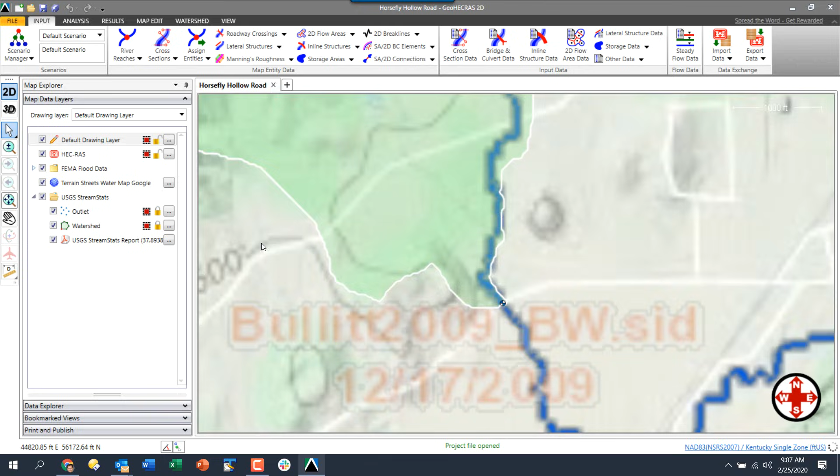You guys all did that bridge project yesterday. So let me go see if I can find that one. So let me go in my folder, under training examples, bridge project. Let me see if I open this guy up. Oops, wrong file. So let me grab the other one. Go open that one up. There we go. That's a bridge we had yesterday, right? And someone was complaining about not following the contours.

The problem with it is it's following the grid, and what's happening is it's smoothing those contours out. This grid resolution is 8 feet by 11 feet. So that's part of the problem, it's not following those contours because it smoothed those contours, and in reality it's trying to follow that grid. And then it smooths that edge of that line, so it gets a little different.

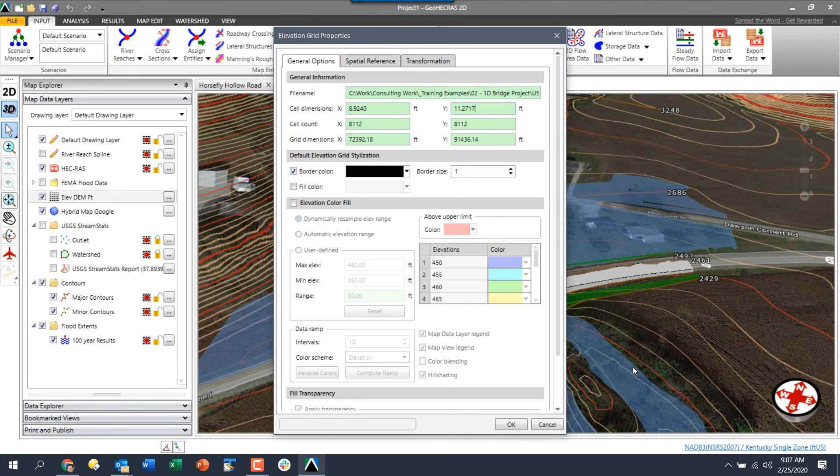The other thing is, someone reported that it filled in this area here. And what caused that, if I go over to my results, go to flood map, in here's an option for filling that area. I'm trying to remember where it is. I think it's right here. So remove ponded areas and holes less than or equal to 10,000 square feet.

So if you change that value down lower, this hole over here that you see in my original model, in my training course, that hole will show up again. So you can change that option. Either turn it off or lower that value.

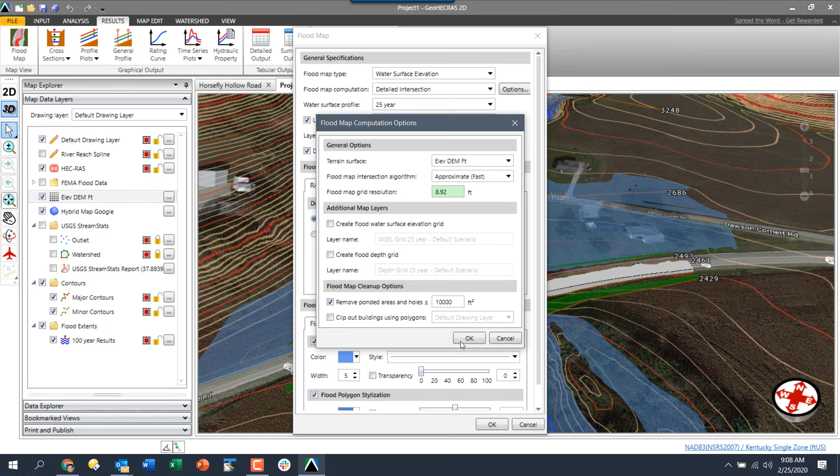And then someone asked yesterday, they wanted to go and clip out some buildings. So if you create a polygon layer in GIS and use that, you can clip out those buildings using this option there. And I could demonstrate that real quick. We'll go back over to the first project I did yesterday. So let me go find that. It was for the city of Akron.

And let me just see if I have that model here. There it is, flood analysis. Hopefully it has all my data in it. I don't remember if I saved it, so we'll see.

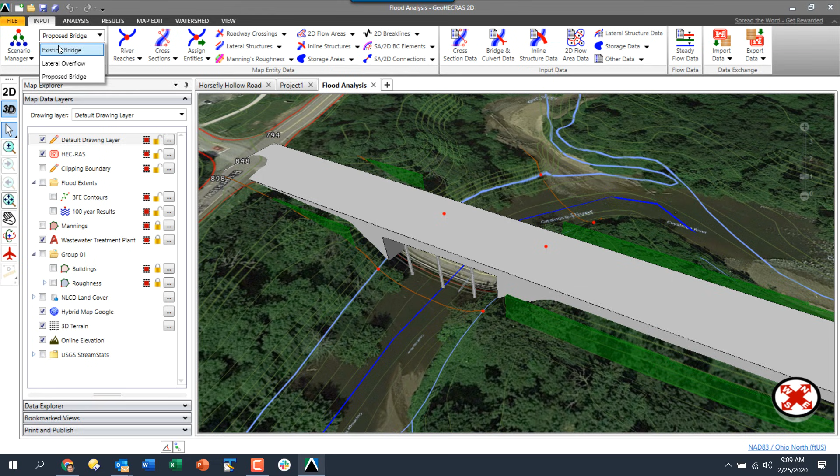Sure enough, so there's my model from yesterday. Remember that? In fact, that'd probably be a good one to do scour analysis on, right? So we can go look at our existing bridge, that one. But we did have some structures here, right? We had some buildings. I'll turn the buildings back on so we can see them. You see all those structures there? And when we generated our flood map, of course, it covered up those buildings.

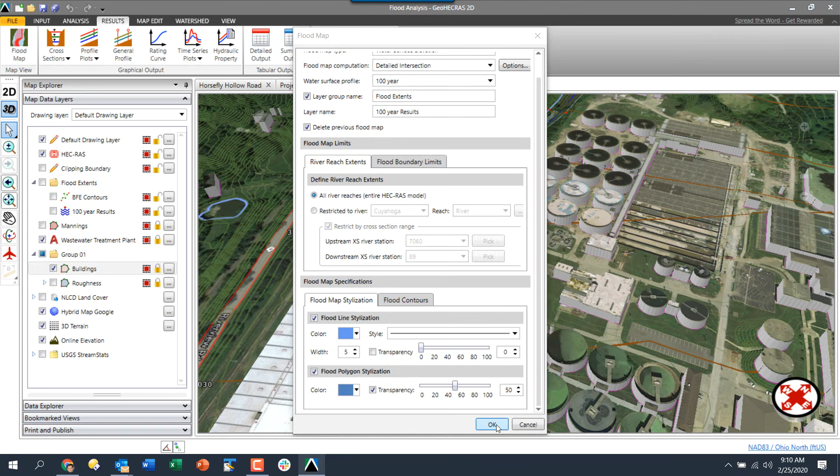So if we go generate that flood map again, if we go to results, go to flood map, and I want to look at my 100-year storm, and I think everything should be good. I'm not going to turn on the buildings yet, so we'll leave that off. And just hit OK. It's going to recalculate our flood map. And we can see our flood map in there, but if I unclip the buildings here, you can see it's covering up where the buildings are.

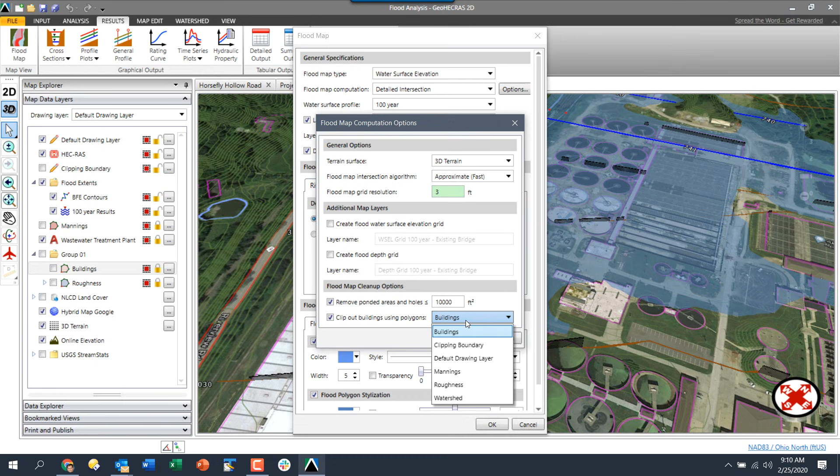So I might want to crop where the buildings are. So what we'll do is we'll go ahead and leave the buildings turned off. I could turn them on again, but we're going to go over to our flood map computation options. We'll go ahead and clip out any buildings, and notice it looks through the list of layers looking for a word like building or structure or whatever, and it tries to guess at what name that is.

And then I'm going to turn this option off, otherwise it's going to fill up all these holes here. Hit OK. Hit OK again. It's going to recalculate that for us and should clip that for us. See, so now you can see these holes are put in your model. So there's some additional options there.

If there's things that we're not doing though, let us know, because someone had mentioned something yesterday to improve the program, and that's something that I had never thought of, a kind of unique idea. So as you're working with the software, just use this as a sounding board. Most of the stuff you see in the software actually came from users like yourself saying, this product's pretty good, but you could improve it some. And so we definitely appreciate that.

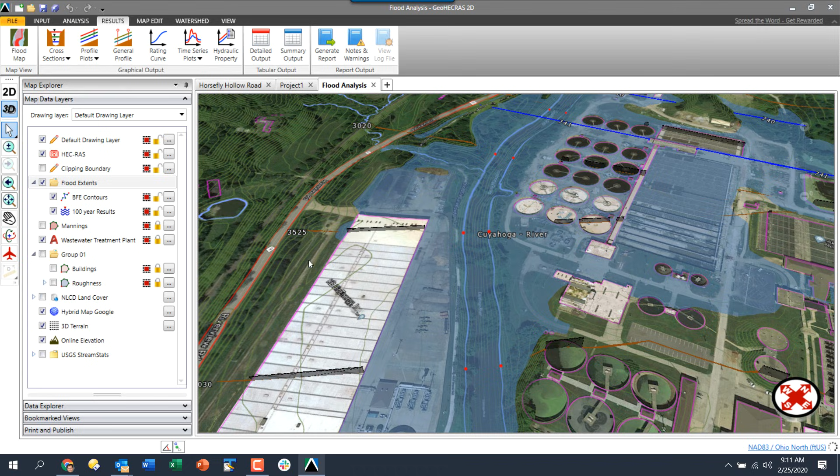Well, let's go and do a scour analysis on this, right? We have this bridge down here, and you can then try it on your bridge. So we're going to go and look at that for the 100-year storm, see what happens for that bridge structure. So to actually calculate scour, I have to have a velocity distribution through the bridge opening, or I can't tell exactly what the velocities are around those bridge piers and the abutments.

So if I go and look at that structure in our cross-section plot, right now you see it's a solid color. If I go to options and I turn on velocity distribution, it's just colored as one color. That tells me I haven't computed the velocity distribution. So there's specific instructions we have to give HEC-RAS to calculate that. So there's different types of scour. There's abutment scour, that's around the abutment. There's pier scour, and then there's contraction scour.

In fact, I have a PowerPoint that demonstrates that. Let me see if I can find that quick. So we'll go over into my courses here. Let me see if I can find where that one is. Trying to remember which one. I think it's advanced bridge modeling. Let me take a look at this. All right, so there we go. So let's go over this. All right, so we'll look at bridge scour.

So scour is probably the main cause of bridge failures. From analysis here, it says 60% of bridge failures are from scour. So what's happening is usually the foundations or the piles for the piers are eroding away, and the pier becomes unstable, like you see here, and the bridge fails because of that. So as the water contracts through that opening, it speeds up.

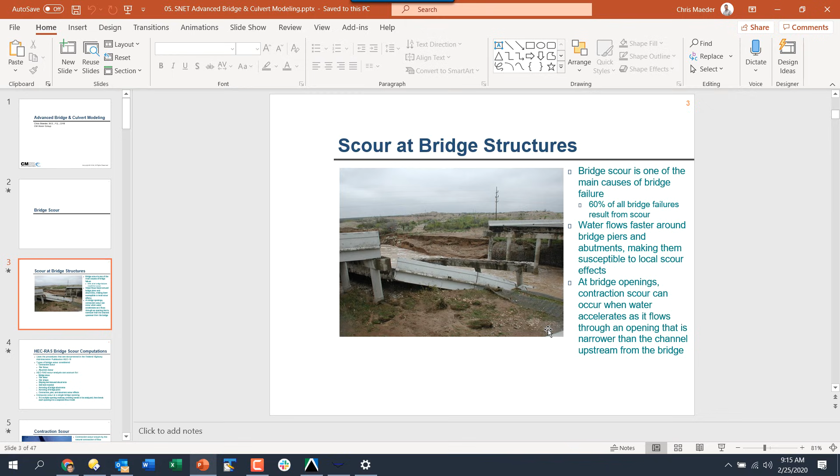So there's a document called HEC-18. It's published by the Federal Highways. It has no relationship with the Army Corps HEC Center. This stands for Hydraulic Engineering Circular 18. And they talk about the different types of scour. There's contraction scour, pier scour, and abutment scour. We'll go over that in this presentation.

So based on the bridge skew, the pier shape, and the abutments, that can change the amount of scour that occurs at a structure. And HEC-RAS only computes the scour at one bridge opening. So if you have a multiple bridge opening, you actually have to break the model up, so you have to analyze each bridge separately.

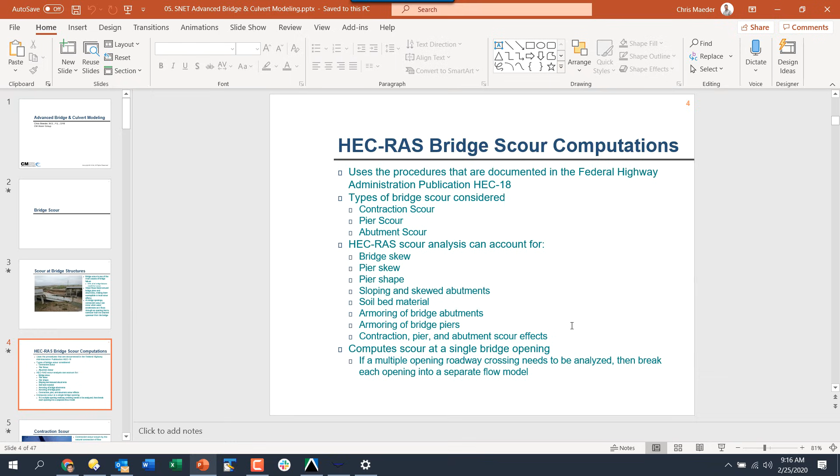And the way you do that is you have to close one off, model that, and reduce the amount of flow so it's going through the one bridge as you compute it through your multiple bridge opening, and then analyze the other one the same way.

So first thing we're looking at is contraction scour. So as the flow contracts through that opening, it's going to speed up. And so there's two types of scour that occur. And again, the mechanics of that scour is pretty sophisticated, so they develop empirical equations to kind of predict that.

And based on, you either have sandy soil or you have clay soils, and that can have a different effect in there. Usually clay soils just take longer, and usually the same amount of scour occurs over a long period of time. But anyways, there's something called clear water scour. It's basically assuming that the water upstream of it has got no sediment in it. There's no suspended sediment. And then there's live bed scour, which actually has sediment in that.

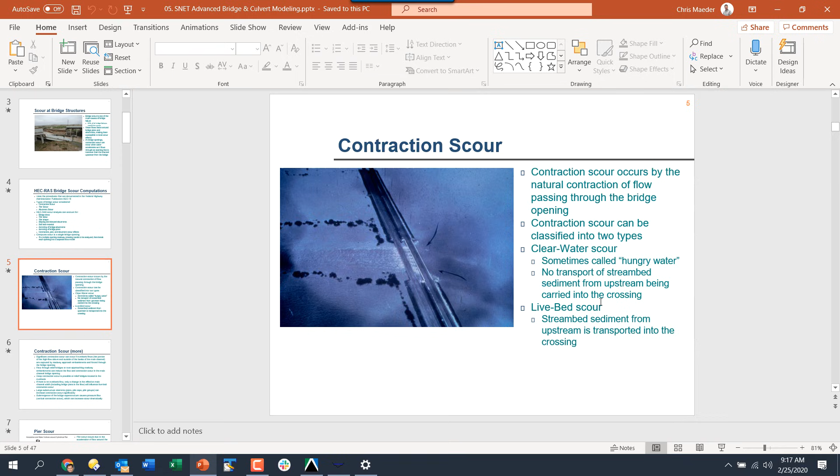So there's two equations that are used for predicting that. And you got to be careful of these equations. They give you kind of an estimate, but sometimes they can get unrealistic. So I have this description here. I'm going to just read it because there's too much text to kind of summarize it.

So significant contraction scour can occur if the overbank flows, the portion of the high flow above and outside the banks of the main channel, are captured by the roadway approach embankments and forced through the bridge opening. So that makes a lot of sense, right? So if we got a lot of flow on the overbanks, as the flow contracts through that bridge opening, it's going to speed up quite significantly, and that will cause quite a bit of scour.

Flow through relief bridges or over approaching roadway embankments can reduce that flow and the contraction scour. So if we have a place where water can divert itself, obviously it reduces the amount of water that's flowing through the main bridge opening. Deep contraction scour can occur also in the relief bridges located in the overbanks. Again, you can't analyze that directly with HEC-RAS. You'd have to break that model up into pieces and analyze each one separately.

If there's no overbank flow, only a change in the effective main channel width, including the bridge piers in the flow, that will influence the live bed contraction scour. Large substructure elements like piers, pile caps, pile groups can increase contraction scour significantly. Basically, it creates a pressure flow underneath there and speeds up that flow again, kind of like flowing through an orifice. You would think of it like if you punched a hole in a milk jug. You're going to have a lot of velocity on that.

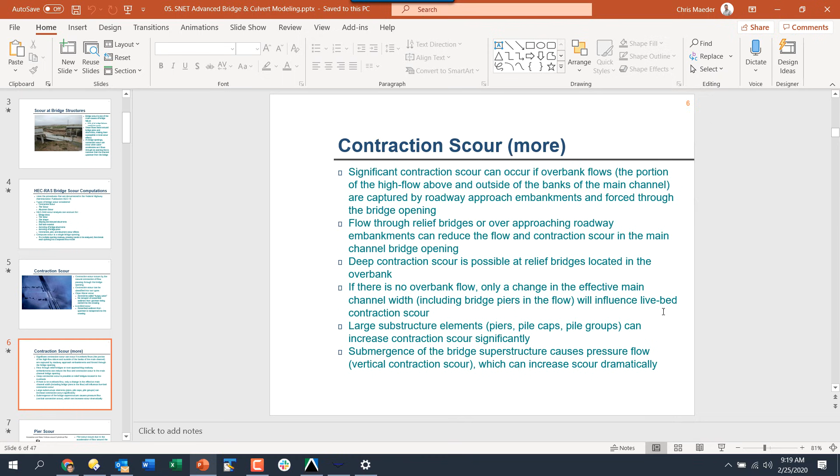Okay, next thing we're looking at is pier scour. So there's two types of scour that can occur. There's a wake vortex and a horseshoe vortex that occurs. So pier scour occurs due to the acceleration of flow around the pier and the formation of these flow vortices, known as a horseshoe vortex. So the water kind of tumbles on itself as it goes through there and digs up behind that, along the edge of it. Then the horseshoe vortex removes the material from the base of the pier, creating a scour hole.

As the depth of that scour increases, the magnitude of the horseshoe vortex decreases. So it kind of gets reduced by that, thereby reducing the rate that material gets removed from that scour hole. Eventually you get to a point of equilibrium between the bed material being withdrawn and deposited, and basically the scour hole stops growing.

So if we look at that in more detail, the width of the pier has a direct effect on the depth of scour. That would be kind of obvious, right? Wider piers produce deeper scour than narrow piers under the same conditions. The maximum expected pier scour depth ranges between 2.4 and 3 times the pier width for circular or round nose piers aligned with the flow. Now, circular piers are almost always aligned, right? I don't know how you would have it not aligned.

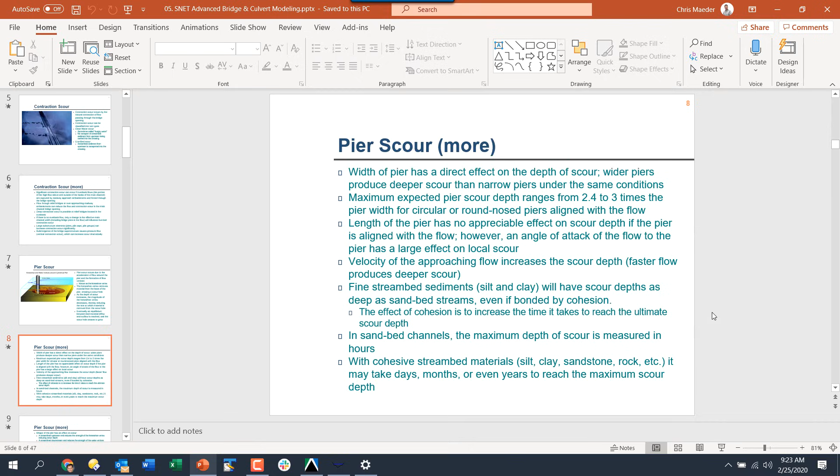All right. In sandbed channels, the maximum depth of scour is reached in hours. So the first time through it, it's going to erode quite quickly. Whereas cohesive stream beds, you talk about clays, silt, sandstone, even rock, it can take days, months, or even years to reach that maximum scour depth.

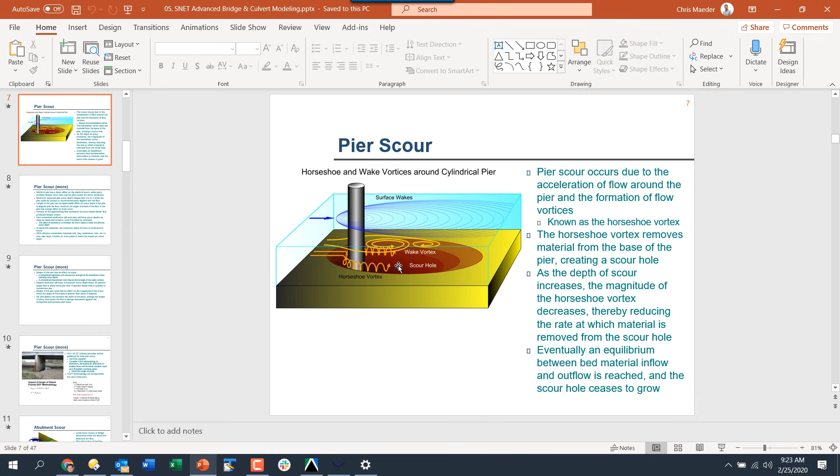So the shape of the pier has an effect on that scour. A streamlined upstream end reduces the strength of the horseshoe vortex, reducing the scour depth. A streamlined downstream end reduces the strength of the wake vortices. So if you remember, if we go back to that picture, we have two types of scour here. We've got our horseshoe vortex occurring here, and we've got our wake vortex that's occurring there. So it's two effects that we're trying to simulate.

A square nose pier will have the maximum scour depth, about 20% larger than a sharp nose pier and 10% larger than a cylinder or round nose pier. The shape of the pier nose has no effect on the magnitude of the scour when the angle of attack is greater than 5 degrees. So if we have a skewed bridge pier, it doesn't matter what the shape is. It'll be the same amount of scour. Now, like I said, if you have a round pier, there's no skew angle associated with that unless you have some sort of diaphragm between the two piers.

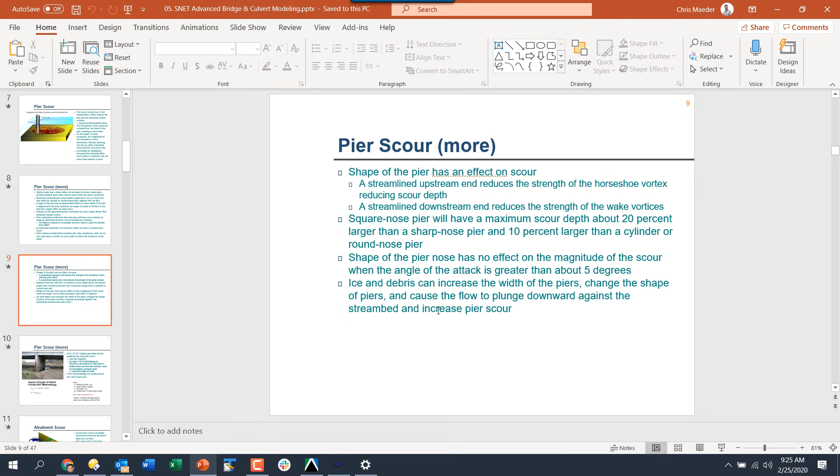Ice and debris can increase the width of piers, changing the shape of the piers and cause the flow to plunge downward against the stream bed and increase the pier scour. So that's something you have to analyze when you're doing bridge modeling. Up in Canada, I do projects up there occasionally. They have to worry about debris a lot because they'll get a storm and logs and other stuff will be floating down. It'll get hung up underneath the structure, decrease the bridge opening and increase the velocity of flow going through the bridge opening, creating more scour. So that's a real problem for them up there. And I would assume you probably have similar instances around here.

So HEC-18 provides further guidance on local pier scour. They say use the Colorado State University equation, but there's a new equation that was developed by Florida DOT as an alternative for wide piers, where you have very shallow flows with fine bed material. That is not yet incorporated into HEC-RAS. So if you want to analyze that, you have to download that document, HEC-18 fifth edition, and do it with a spreadsheet. And you can do it quite easily. The equations are set up. In fact, you could probably search for a spreadsheet for that equation and pull it up.

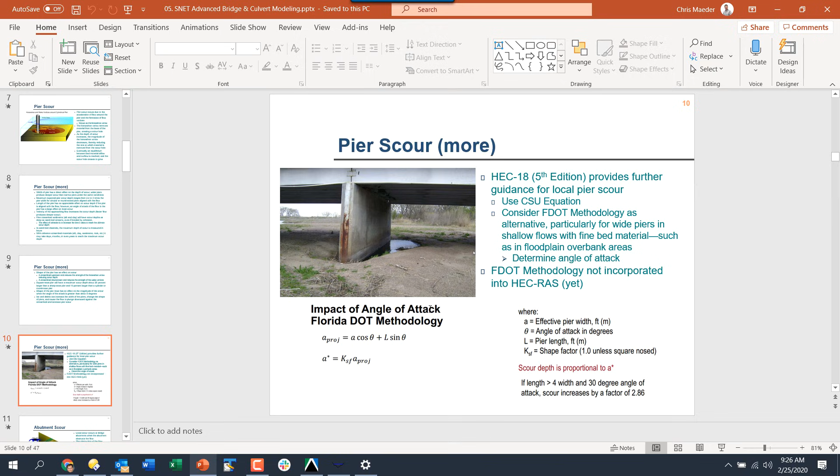So local scour occurs at the bridge abutments when the abutment obstructs the flow. It's pretty obvious, right? The obstruction of the flow forms a horizontal vortex starting at the upstream end of the abutment, running along the toe of the abutment, and forms a vertical wake vortex in the downstream end.

There's one by Richardson called the HIRE equation, and then there's one by Dave Froehlich. I went to school with Dave, so that equation was developed when he was at the USGS.

So abutment scour, there's potential for lateral channel migration. So basically it can move sideways, right? So you can scour out your abutment and your bridge can move. So there you want to look at armoring. You want to go and armor that abutment so you don't have that issue. Long-term degradation and contraction scour should be considered when monitoring the abutment scour.

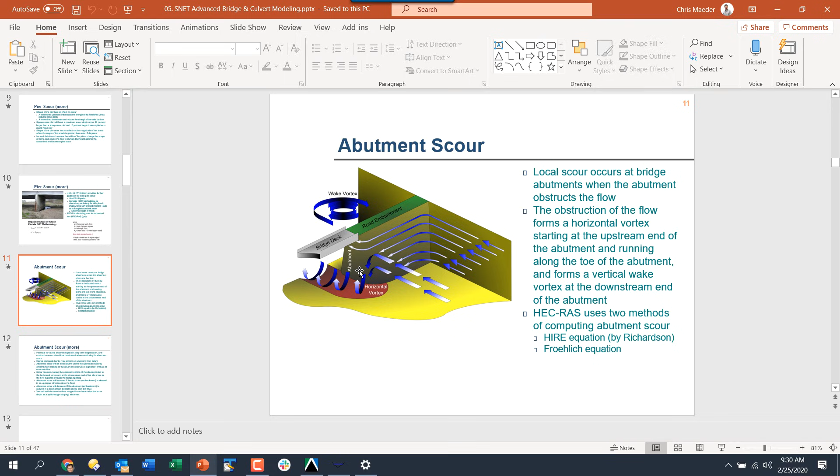Okay? Because if we look at this picture again, if I have a vertical abutment here, that wake vortex can drill right down. If it's sloping, that wake vortex has a difficult time doing that because it's fighting the slope of that abutment and can't grab hold. So vertical abutments have quite a bit more scour. I think I may have given you a number.

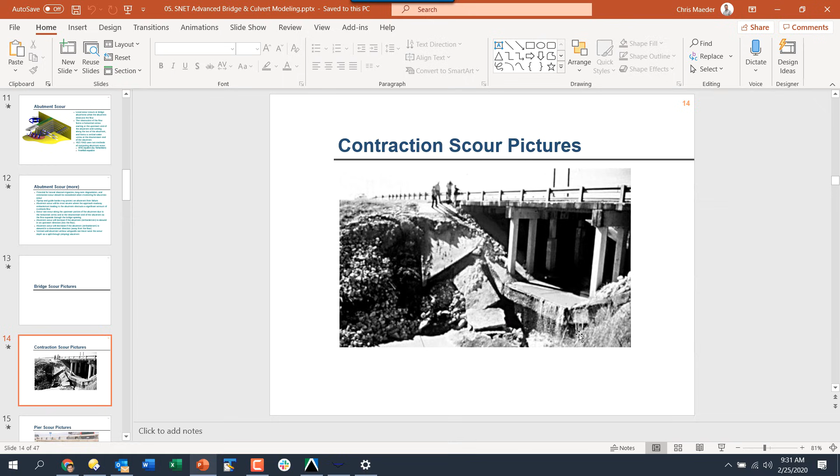So we'll get some pictures here. So this one is in California. It's a while back. They basically lined the bed with concrete, which worked fine, but the problem is that it eroded downstream of that bed, and the concrete fell away. So the bridge piers are still there, but you can see it's starting to erode downstream of that. And this bridge was actually still open, and cars were driving through it.

So in this case, the bridge piers failed just because the amount of sediment coming through there broke them off. So that's quite a bit of load that's coming through there. If you go out and stand in a flood, and if the water is flowing at 6 feet per second, which is pretty fast, and it's up to your kneecap, you cannot stand in it. It'll knock you over. That's how fast just plain water will be causing that.

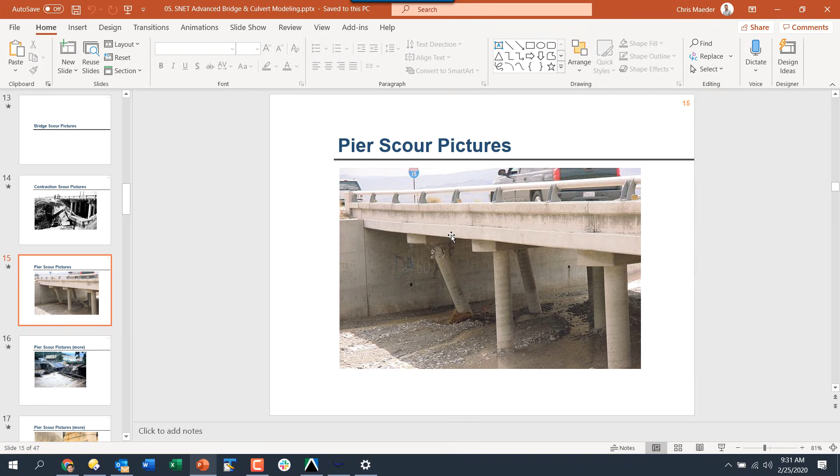Of course, you could go to the beach. I don't know if you have an ocean here, but if you go into the ocean, you try to stand up, and the waves will knock you right over. So if you have a sediment load in there, that's basically mud flow, that'll knock those bridge piers right off. So in this case, it just tore them off, and you can see the actual bridge is kind of bending down in there. Which state is that?

California. So this is up in Canada, and here's a case where they had a spring thaw, and a lot of debris came down, and just because of the debris that got plugged up inside that bridge opening, it took out that deck. And you can see they put in piers to try to handle that. They put in a sharp edge pier there to kind of break up that debris, but still, if you don't get out there fast enough with an excavator and start pulling that stuff out, you can have some issues there.

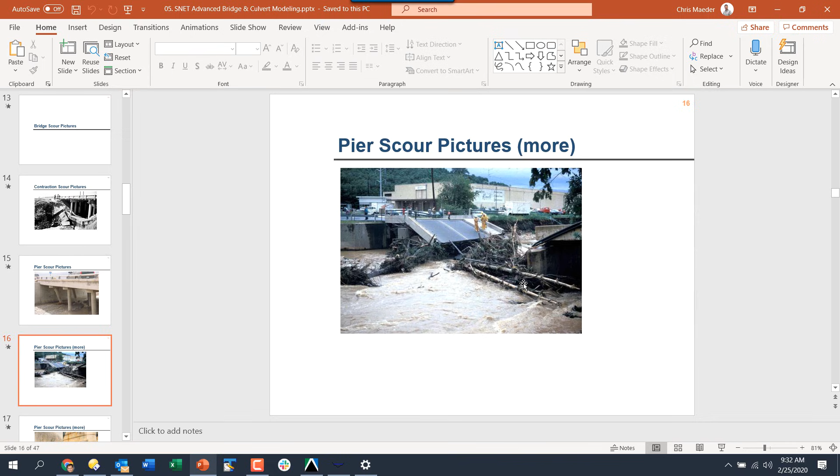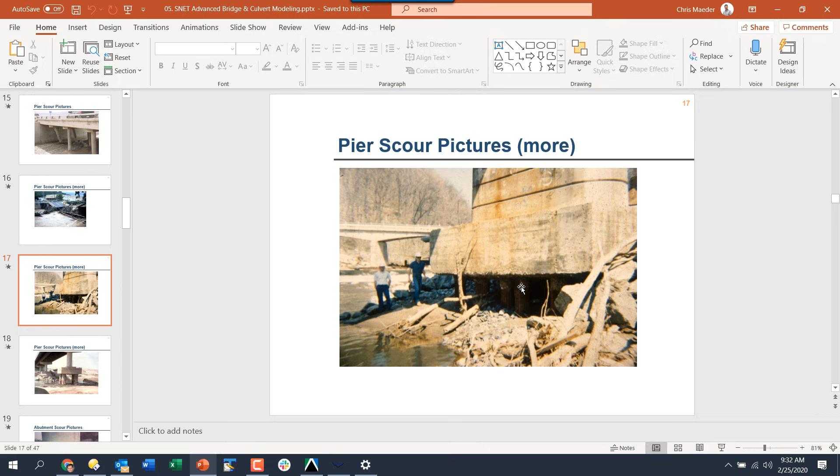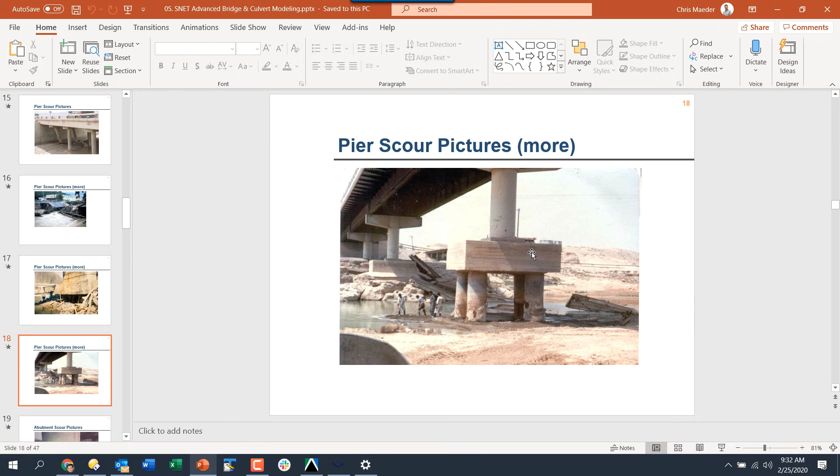Here's one where you can see it scoured away. It took it right down to the pile cap. It's hard to see, but you can see the piles underneath it, and it's filled up with debris, right? It's filled up with a bunch of stuff. They got to go back in there and fill that in and repair that. Here's another one where they got caissons. I don't know what they're doing out there with shovels, if they're trying to fix that up.

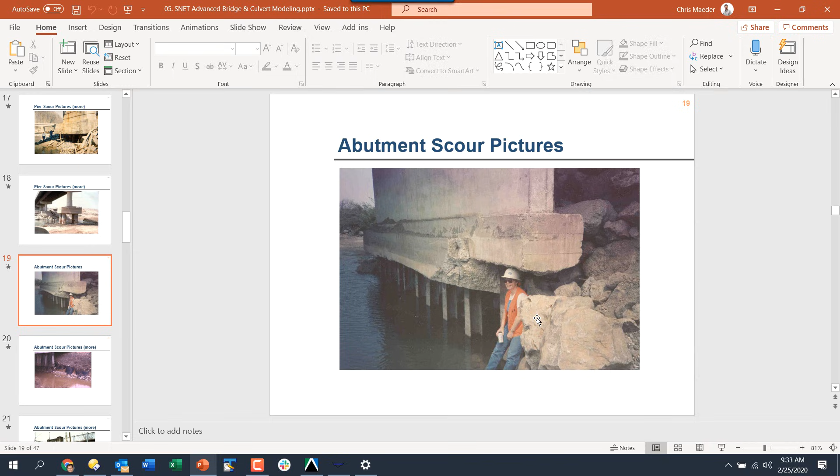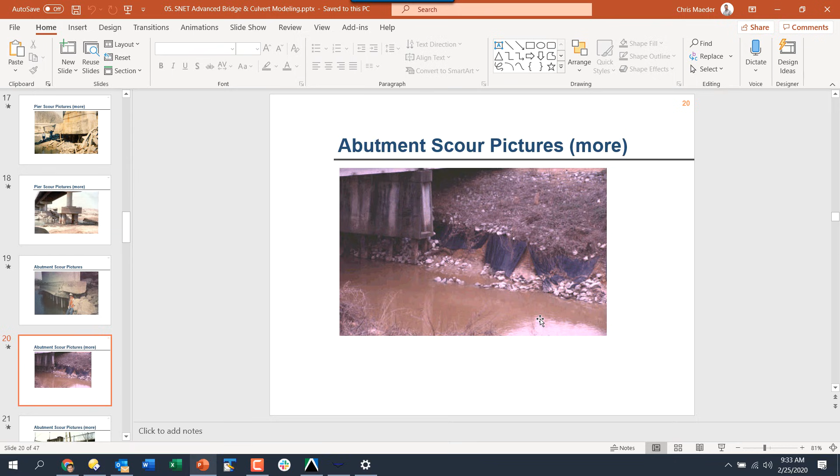So here you see a case where you have abutment scour. You can see that's rock, right? And it took all that rock out of there. So it can cause quite a bit of effect. Here the same thing, where they had some geotextile in there to kind of retain that, but the salesman will tell you, sure, it'll hold up, but in practice maybe it doesn't, right? And this has got sloping abutments, so you can see it sloping in there, but it took all that out.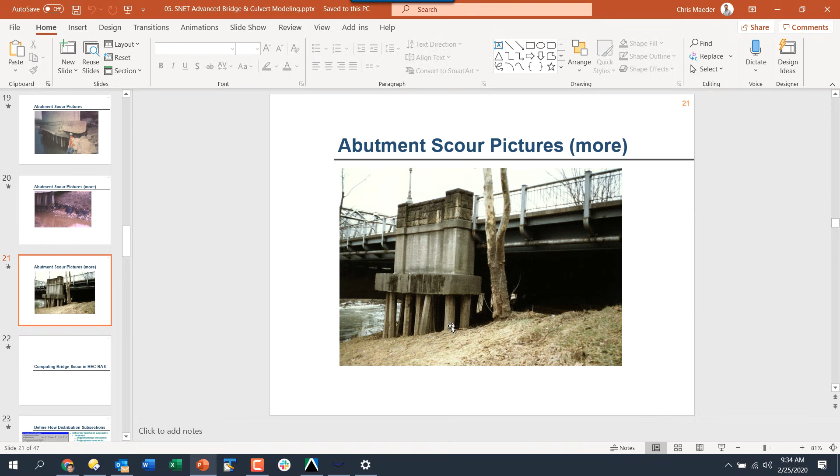This is from New Jersey. They have a very active bridge inspection program. They come by and inspect every 30 years or so, because you can see how long this tree grew, right? And this pile cap has been sitting there for that long while that tree has grown to that size. So you can see there's quite an issue there.

So if we look at computing scour in HEC-RAS, you have to basically define what they call flow distribution subsections. You're going to define HEC-RAS to have little stream tubes, and it's going to look at the bridge downstream cross-section, the bridge upstream cross-section, and then the approach cross-section. Those are the only three cross-sections you have to worry about. Basically the same ones you define contraction and expansion coefficients at. So it subdivides that up to a maximum of 45 subsections at each cross-section. You can't go above that.

And so you could have any kind of combination. For example, you could have 43 subsections in the channel and one in the left or right overbank. And so it depends on what scour you're trying to analyze. If you're going to have a lot of abutment scour, then you want to have more subsections in the overbanks. If you're basically worrying about pier scour, then you want to have more subsections in your channel, but you're limited to 45.

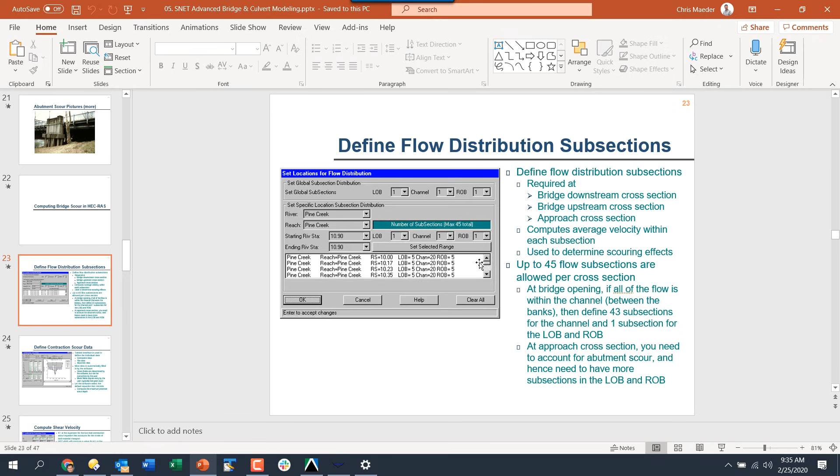Okay. And so in HEC-RAS, there's a kind of a tabbed interface, and I'll show you how that operates there. Basically, all the green fields are filled in by HEC-RAS. That comes from either the input data or the analysis results. And the only thing you really have to define is grain size, and that's in millimeters, and you have to have a D50 sieve and a D90 or D95 sieve.

And a D50 sieve, if you remember back in soils class, and I had soils at 3:30 in the afternoon, and I was just dead tired by 3:30, so I kept falling asleep in that class, and it was hard to stay awake in soils.

Okay, so the black fields are what you enter. You also have to put in the K1 coefficient, which is based on water temperature. So they've done some studies and they say that warmer water causes more scour than colder water. I don't know why, but I guess maybe if you have clay, if it's cold, the clay is more cohesive than if it's warm, it tends to loosen up.

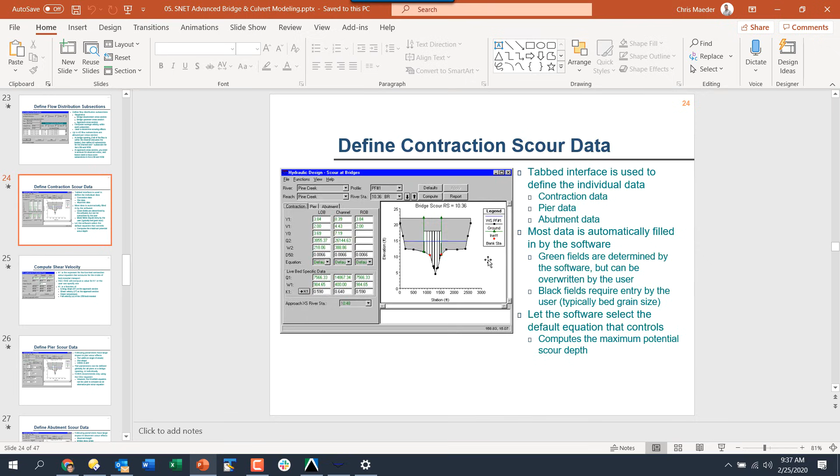Okay. Now it'll go and look at the equations. There's different equations that are used for those. So like here for contraction scour, we have live bed and clear water equations. It'll look at both and then choose the larger one that controls. But sometimes you get ridiculous numbers, so you have to kind of be careful what you look at there.

All right, so here's your K1 coefficient. Again, basically all you have to do is change your water temperature. Assume 60 degrees Fahrenheit. And then you define your pier scour, basically defining your pier shape and the angle, if it's skewed to the flow or not. And everything else is basically filled in for you.

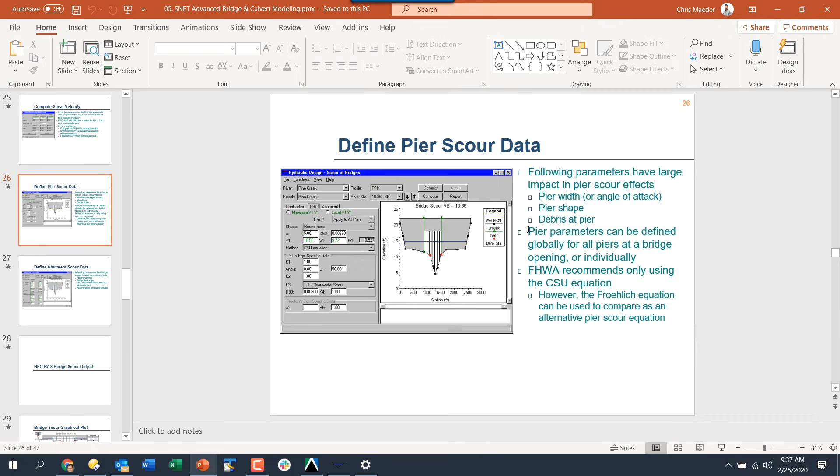And there's two sets of equations, one by Dave Froehlich and the Colorado State University equation, but they don't recommend the Froehlich equation because it doesn't seem to hold up in practice that much. It's used for specific conditions, so you have to read the documentation and see what conditions it applies for. Basically, he did that equation for the Missouri River. So if you've got a river the size of the Missouri, then that equation is probably good to use, but otherwise most bridges are not that size.

Then abutment scour. Again, there's two sets of equations. Again, it'll go ahead and choose which one controls. There's one by Froehlich and then the HIRE one by Richardson. And basically the key thing here is you have to put in if it's a spill-through abutment, meaning that you have sloping abutments on there, or if they're vertical. And vertical causes more scour.

And we can take a look at that. And then if there's an angle associated with that. So by default, it's 90 degrees, so it's saying it's perpendicular to the flow. I've seen though the abutment scour equation gets a little carried away there, so I'm sometimes concerned about that because you'll get scour holes that are unrealistic.

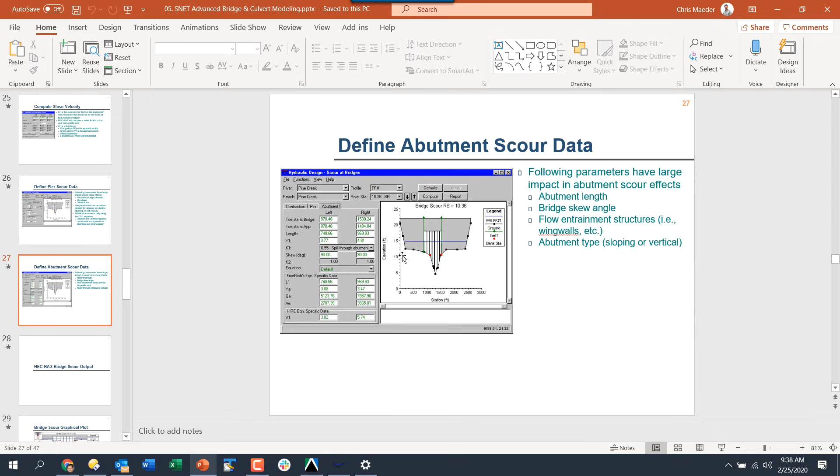So I'm not a soil mechanics guy, so I'm not an expert in this field, but I'll talk about what I know, all right? So first thing is to eliminate pier scour, don't put piers in, right? So if you can just clear span, that removes any potential pier scour. It also reduces your construction costs sometimes because you don't have to go so deep and hit bedrock or whatever and have to worry about armoring that bridge pier.

Sometimes you can't, the span is too large, right? So if you can increase the span between the bridge piers, you have less piers, right? And you allow a more open area for the water to flow through. Versus that one up in Canada, remember with all the debris in there, they could have probably clear spanned that if they tried, but they didn't at the time.

So you can put riprap at the piers to reduce that scour. However, that basically reduces the hydraulic capacity of the bridge opening and also causes some issues where debris can get hung up. It basically also changes the shape of the bridge pier. So you want to go and see what kind of shape you want to put in there, and try to eliminate the potential for any debris to get hung in there.

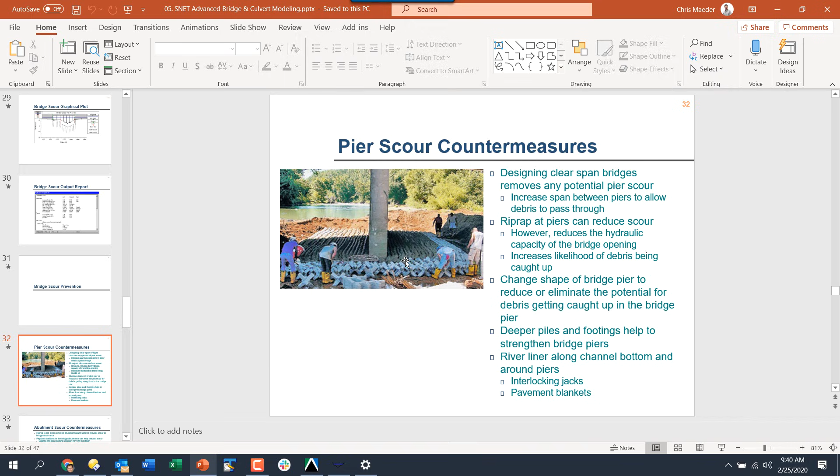Put in deeper piles and footings to help strengthen the bridge pier, but that's going to raise your construction cost. You can line the river along the bottom, putting in these interlocking jacks that you see there, or sometimes they put in pavement. They'll actually go out with an asphalt paver and pave the bottom of the river. But you've got to divert the river and all this other stuff that's kind of difficult at times. And again, that's only a temporary solution. You saw the instance where in California it actually eroded that away.

So abutment scour countermeasures, we look at that. Riprap is the most common measure for that. So you can basically put stone around the abutments to prevent that. You can put physical additions to the bridge abutment to prevent scour, like gabions or stone pitching upstream from the foundation. Sheet piles, interlocking prefab concrete blocks also help in some regard.

If you can put a trapezoidal shaped channel through there, rather than vertical walls, that can significantly reduce the local scour from that. Basically it provides a smoother transition through the bridge opening as that flow transfers through there, and eliminates basically any abrupt corners. And those abrupt corners are what cause turbulence, and that's causing your scour.

Something you can also look at is what they call river training structures. Basically, you're trying to train the water to flow through the opening nice and smoothly. And so you can put in what they call spur dikes or wing walls or barbs or groins or vanes. There's different ways to kind of train that water to flow through that bridge opening and reduce the amount of contraction scour and abutment scour that's occurring there.

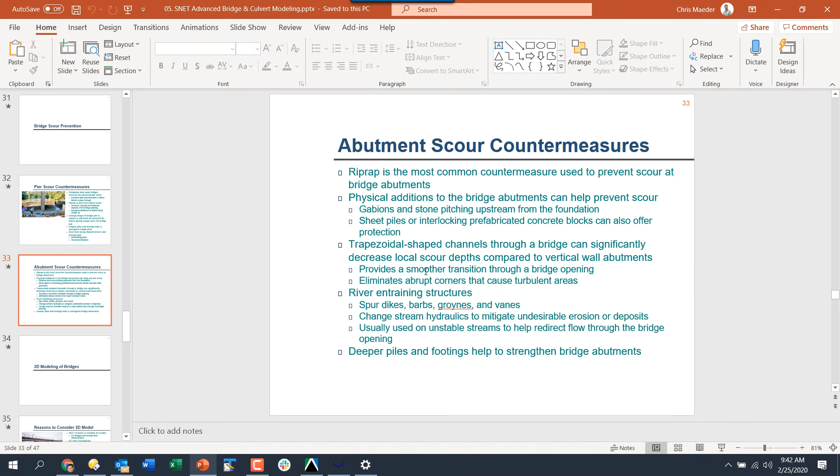So you usually use that at unstable streams where you might find some migration of that stream. You want to prevent that bridge from failing due to that stream migrating. So it kind of directs the flow through that opening. Again, you probably want to work with someone who's an expert in sedimentation modeling. It's a difficult field. You can get a doctorate in it. It's pretty complex. Okay. So we can also do 2D bridge modeling.

Okay, so HEC-18 recommends using a 2D model for complex flow conditions. So in our model that you saw earlier, the one I did yesterday morning, we had a pretty complex flow situation. We had a tight turn in there, so it might make sense to go and look at that from a 2D effect. So we can account for embankments that are skewed to the flood flow.

We can look at multiple openings now. When we're doing 2D analysis, we can consider wide floodplains. We can look at highly contracted flow. So when we're analyzing in 2D, we can do a much better analysis with that. Unfortunately, when you do that 2D analysis, you have to do the equations manually. You have to use a spreadsheet for that. But you can take the values out of HEC-RAS and plug them in fairly easily. So we'll take a look at that.

Now the Army Corps HEC-RAS does not directly model bridge piers. So we put an ability to put the bridge piers in with our software, and I'll show you how that works. And HEC-RAS doesn't support the bridge deck yet for bridge modeling. It assumes that we can put in the piers, but we can't assume any pressurized flow or road overflow.

If you do have a bridge that kind of looks like a culvert, you can model it as a large culvert, and that's built into HEC-RAS 2D. So if your bridge is rectangular, you could basically assume those are culverts and analyze it that way. But it's using the culvert equations through the bridge opening. But it's another way to at least try the problem.

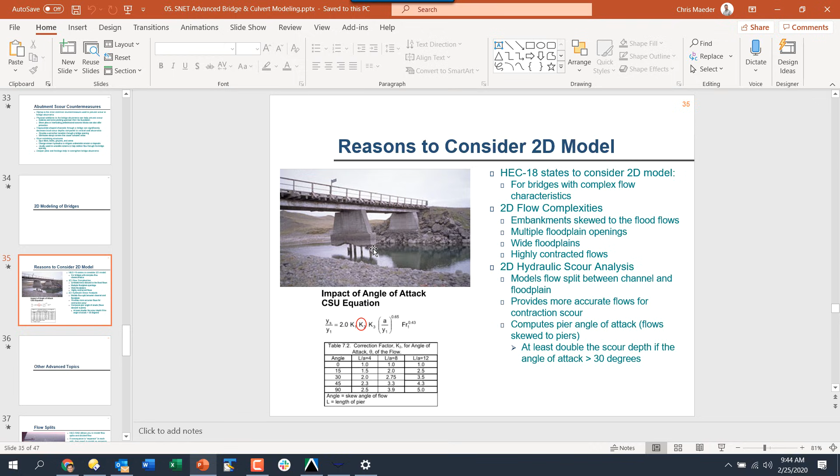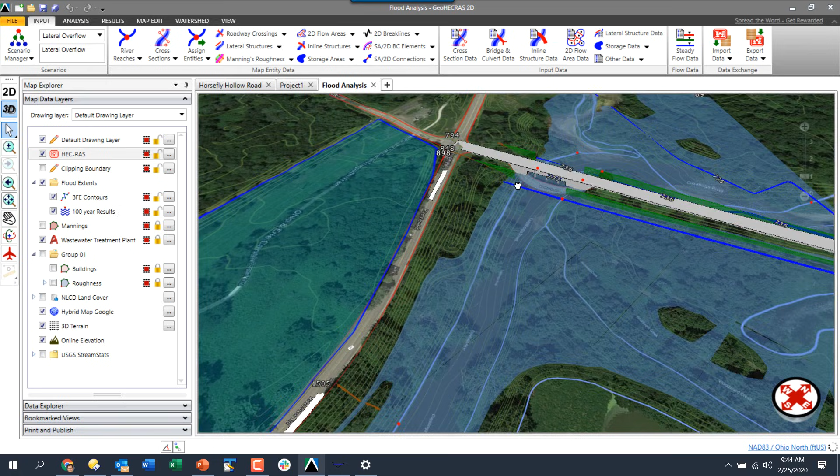Okay, so some other advanced topics. I'm not going to look at this. This is for HEC-RAS. Well, we could talk about it. So we didn't talk about split flows. I talked about it briefly yesterday. Remember yesterday I had this example. If I go back over here to lateral overflow, remember I have this lateral structure over here, and I have that flow that transitions over the top.

If I try to analyze that in HEC-RAS, it won't reduce the amount of flow unless I tell it to optimize that. So there's a function in HEC-RAS to tell it to go and analyze that split flow and determine what is diverted. So that's not on by default.

So under analysis, you have to go over here to flow optimizations, and you have to turn on this optimize checkbox here, and that will then go and analyze. It'll assume that some of that water is getting diverted. When the water gets diverted, it'll reduce the amount of flow in the channel. So you have to turn that option on.

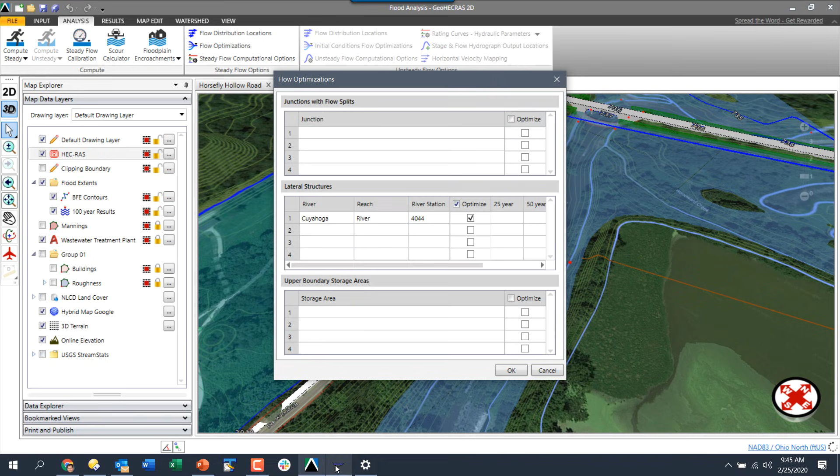Same thing for a flow split. If you have a river where it splits apart, and maybe it combines back later downstream, or maybe it splits and gets lost or something, HEC-RAS won't figure out what's going on in each of those unless you turn on this optimize, and then it'll analyze how much water is coming in on both sides of there and determine what's going on. So there we have to go ahead and look at that. All right, so there's a little checkbox for that in there.

Multiple openings, we didn't talk about that either, but you can have bridge openings with multiple roadway crossings with multiple openings. You can have what they call conveyance flow areas, basically where you're assuming that water is flowing out around the structure somehow. Maybe that's a road. Obviously a road wouldn't have that kind of vertical profile, but let's assume that the vertical scale is much smaller compared to our horizontal scale. You can see this is about 500 or 600 feet across here, and the vertical scale is only like 5 feet. So maybe a road sort of looks like that.

But water would flow out over that roadway, and we're assuming that's not going to act like a weir. So if we want the software to analyze it using normal depth, don't put a roadway there. If you put a roadway in there, it's going to use a weir equation. So if you define your roadway geometry over in this area, it will use the weir equation.

And you should only use a weir equation if it's going to be like a broad-crested weir. Broad-crested: a roadway embankment, the roadway width is probably 30 feet or maybe wider than that. As water flows up over that, that's called a broad-crested weir. And you'd use a broad-crested weir coefficient that's usually between 2.8 and 3.2. 2.8, 2.9 is a typical value you would use. You can look it up in our software. It's built right in there.

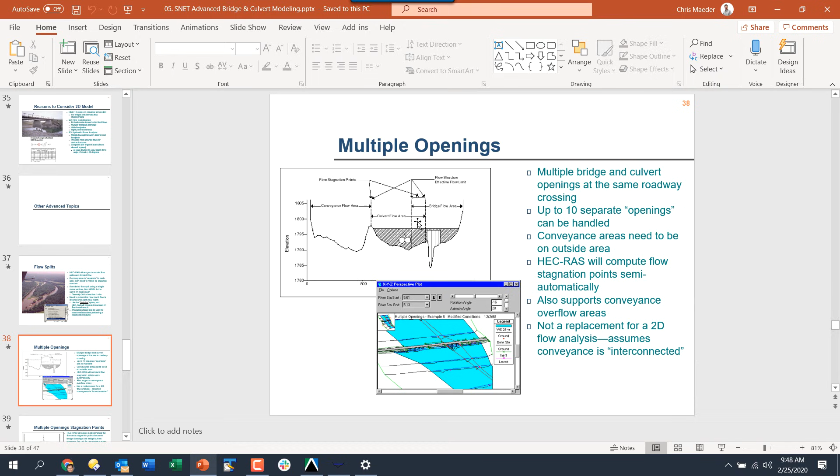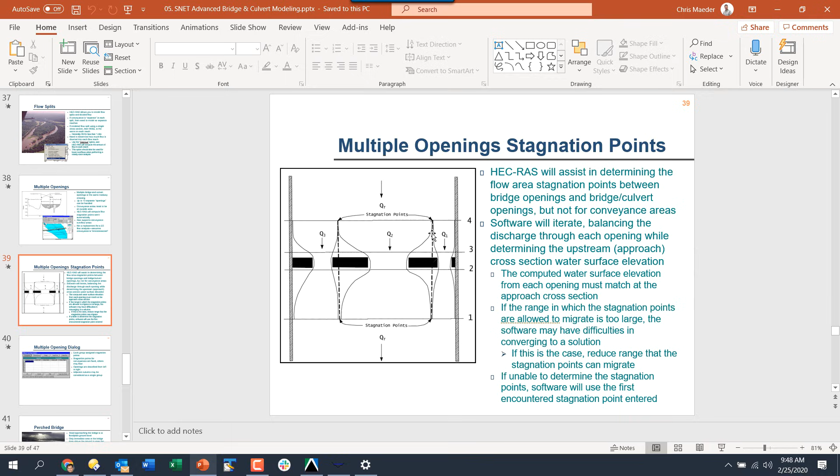So we talked about these stagnation points. Here's an example where we have water coming down. We've got a main bridge and some relief structures here, and it doesn't know where the stagnation points are, so it's going to try to approximate those for you, but you may have to go and work on that. All right, and then perched bridges are just bridges that are basically up above the ground. You've got skewed bridges, and there's a little option there. And then you can have bridges that are offset, eccentric to the actual roadway crossing.

So remember that video we saw yesterday by one of our guys that said you have to define the ineffective flow, like 1-to-1 or 2-to-1 upstream, and 2-to-1 to 4-to-1 downstream. Well, what happens when you have a bridge opening that's very offset to one side? In that case, you might actually need more than one cross-section defining your ineffective flow. So you might have to put in another section here. Here would be your normal exit cross-section. Here would be your typical approach cross-section. You might have to put in some additional sections here to account for that additional ineffective flow area.

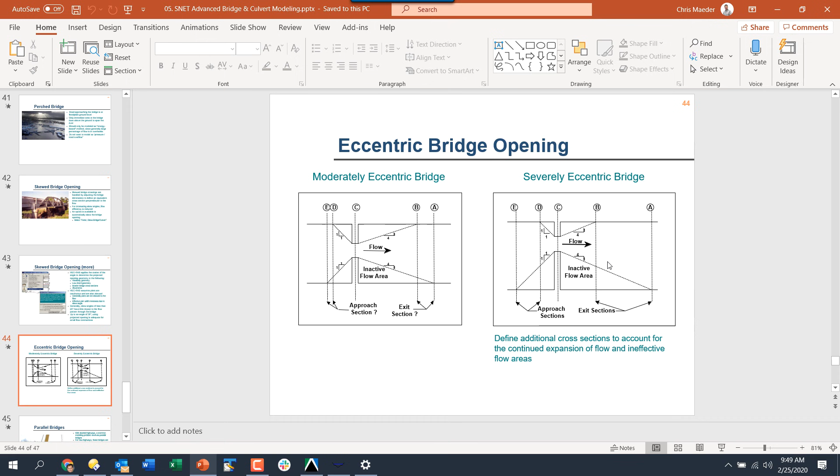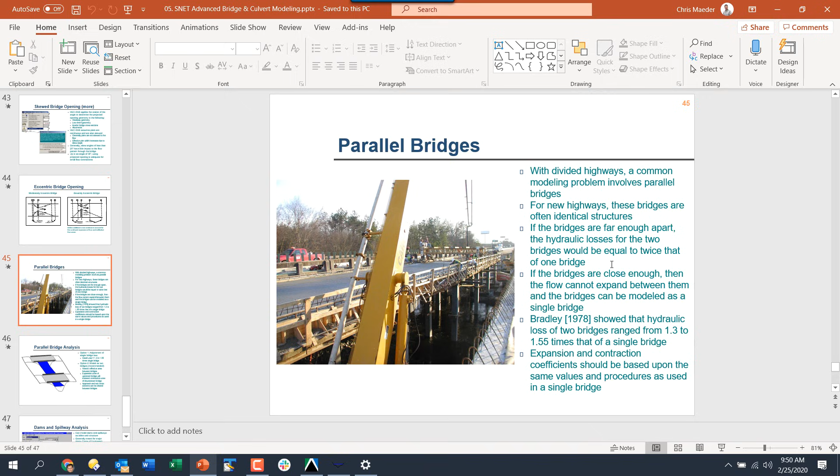Parallel bridges, typically what you do is just model them as one structure, but you could model them separately if the water expands and contracts through them significantly. But most highways, if they put in bridges, they're going to put the same structure in so that the guys constructing it don't screw it up. So they try to make them the same as they install them there. And so in that case, you just model them as one structure.

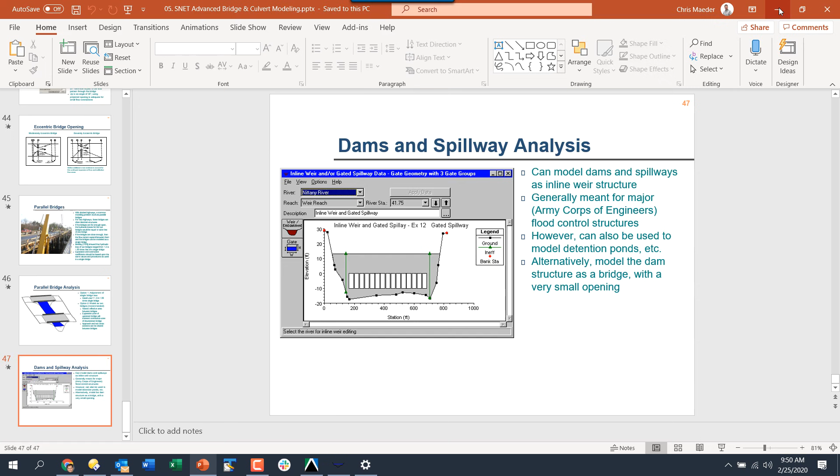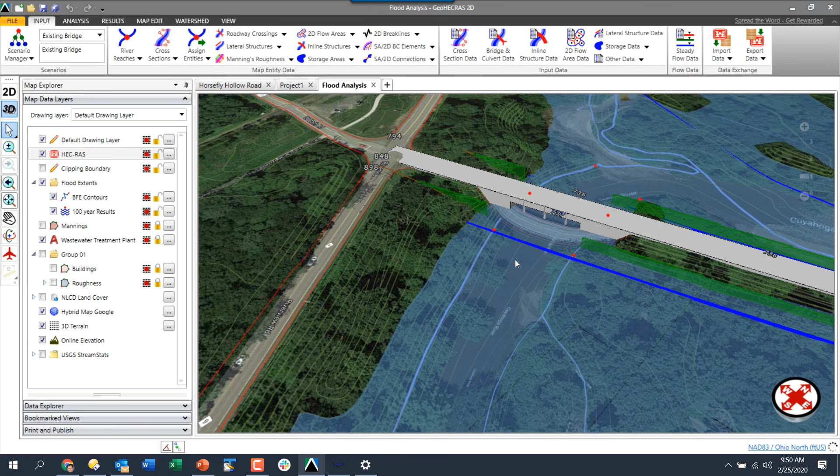Okay. And dams, we talked about dams as well. We did that yesterday. We did a dam failure analysis. So let's go do a scour analysis now. Okay, so let's go back over to our other plan where we had our existing bridge structure. And we want to go on and do a scour analysis on this. So we have to do a velocity distribution analysis. So we're going to go over to analysis.

And in here we're going to go to flow distribution locations. And you can define it globally, and then it applies it to every cross-section. The problem with that option, though, is if you have a very long river, let's say several miles long, it's going to slow down. So you only need to apply it at the bridge structure, downstream, upstream face, and the approach cross-section. So you could come in here and grab the one.

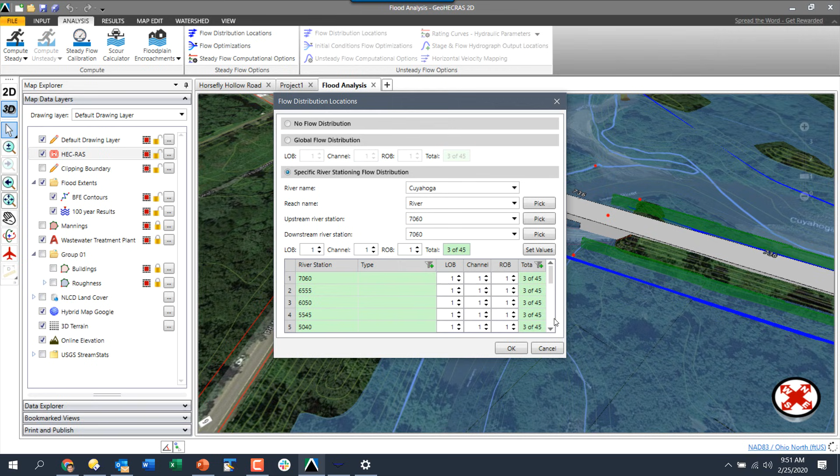So you could say, I'm going to go and pick the downstream one. So I'll come in here, I'll say, that's my downstream one. And then I'm going to grab my upstream one, click on that, and go find my approach cross-section right here. And so I've just got 3 of them selected. And then I could say how much I want in the left overbank, channel and right overbank. So I can have a maximum of 45 of them in there.

So what I'll typically do is I'll put 25 in the channel, and that gives me 10 for each overbank. So it's a good starting point. And usually that'll give me enough detail at the bridge opening. But if not, I can increase the amount of subsections in the channel and reduce the amount in the overbanks, but you can't go above 45. If I try to put in, say, 20 here, it will complain about that. It says maximum is allowed there, and it'll set that back to 10.

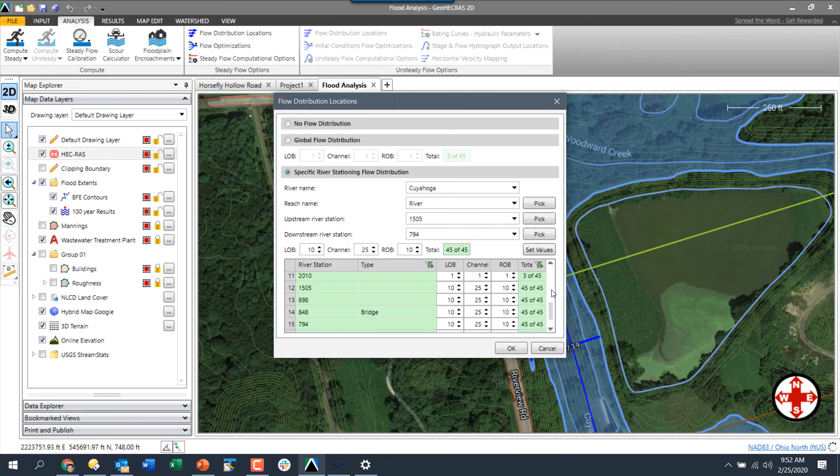You have to click on the Set Values button, otherwise it doesn't do anything. So we basically have defined the information here, but you have to click on Set Values. Otherwise, if we go look at our sections down here that we're working on, you see they're still set to 1. So we're going to have to click on Set Values, and you can see it filled in the ones that we had selected. So it's got those defined.

Or again, you could just do it globally. That's another simple way. So if you only have 5 cross sections or 10 cross sections, it won't make any difference. Software runs so quickly. Click on OK. We have to run our simulation again, otherwise it won't have updated that. So click on the Run button. Let's go run our simulation. Okay, and it's complaining about something in there, but it does look like it ran successfully.

Now in this case, you might want to run it as 4.1 because it really doesn't matter. So I'm going to go switch over to 4.1. To do that, I'll go to File, under Options, switch that over to 4.1, which is quite stable and had good results. Go back in there, go rerun it, and now it'll run with version 4.1. No errors here. So HEC-RAS still has issues, and we report issues to them all the time. Anyway, so we've now run that.

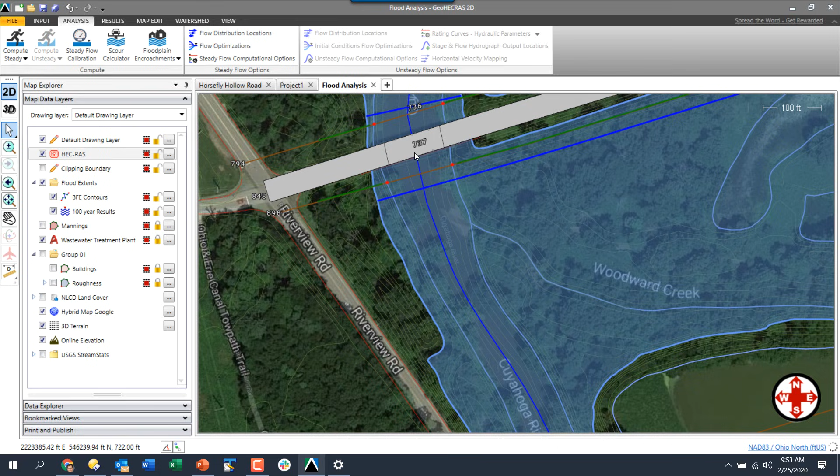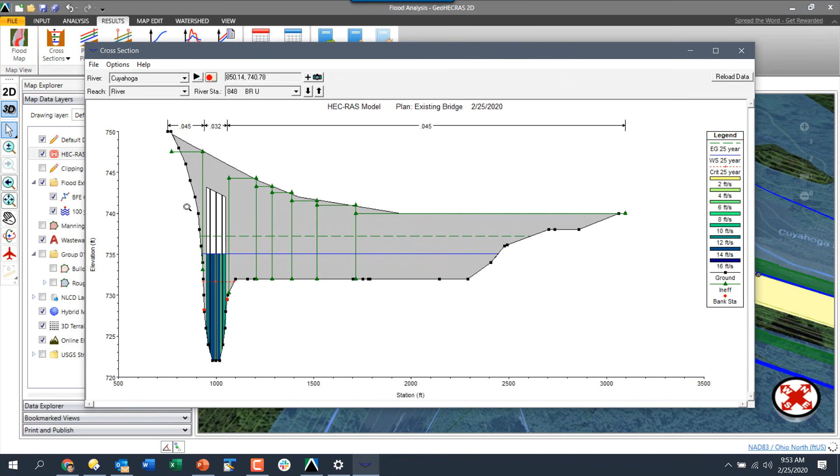So if we want to go look at that structure again, we'll rotate that back around in a 2D view. We want to go look at that structure, go over to our results, go to a cross-section plot. So now if I zoom in, you can see here colorization of what's happening around that bridge opening. And so I want to see the velocities.

I can click on one of these segments, and you just park your cursor there for a minute, and you'll see the velocities. So here it's almost 14 feet per second. So it's flowing around there pretty fast. What's going on right here at the structure, at the bridge pier? There we go. And that's 2.54. So it's slowed down quite a bit at that pier, right?

So the darker colors, you can see it goes up to 16 feet per second. So something in here is 16 feet per second. That's 14. What's this one right here? 14. So somewhere in there, at least the plot is showing this. You can also sometimes, I think if you come in here, click on it, will it show it to you here? No, they don't have that option in there.

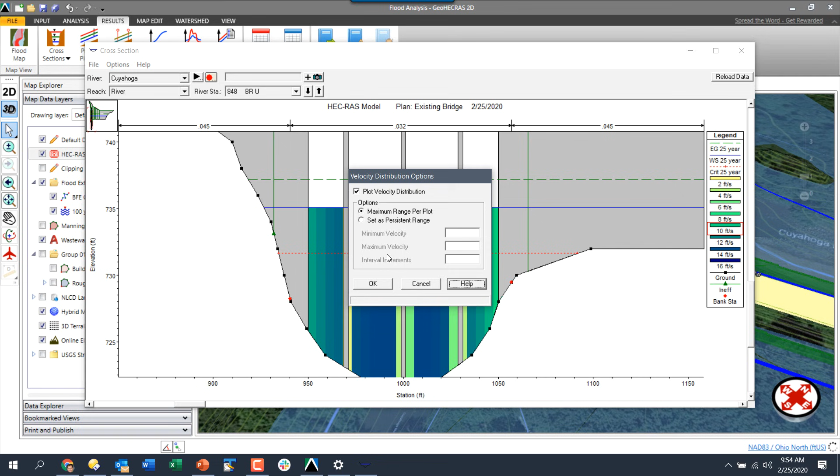Okay, so now we want to actually analyze our scour. Now to get this plot, you may not find it right away. Again, we'll go to Options, and go to Velocity Distribution, and you just toggle this option on. That's all you have to do. So now we've got our velocity distribution through there, so now we can compute the scour. So go to Analysis and click on Scour Calculator.

And we're using the standard HEC-RAS calculator, okay? We're not changing it at all. But we're going to go ahead and analyze it. So we want to look at our 100-year storm. So I'm going to choose 100-year. Sometimes it reports that it can't load the results. But let's see, I think it did. Yeah, it looks like it loaded that one. Abutment. It did pull up my abutment stuff. Let's try the 25. Okay, we'll stay at 25 and figure out what's happening there for now.

So we want to look at our contraction scour. So again, we have quite a bit of overbank flow in the right overbank looking in a downstream direction. Remember that? We're flowing down the river, looking at the river that way. And over on the far right side, we've got a lot of water coming through, right? Now in this particular case, we don't have to worry about these blank values. We have to put in our D50 size.

Now if you don't know what a field is, if you click on the field, at the bottom of that dialog box you'll see it says channel top width inside the bridge opening. So it's reporting to you what these different fields are. That's the channel flow through the bridge opening. So in this case, we're going to look at our D50. It's saying fraction in millimeters. So that's a D50, 50% passing. And a typical value might be maybe 2 millimeters. So we're dealing with some 2 millimeter particles, let's assume.

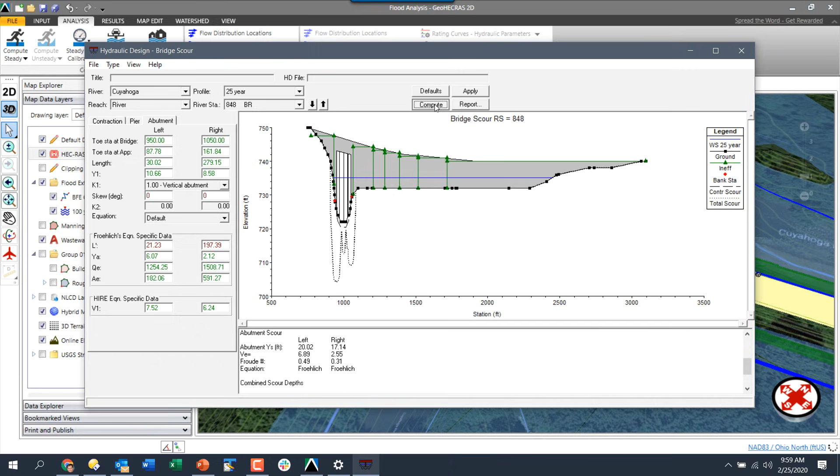But you can see if we zoom in, now we can see our abutment scour. There's a little bit of abutment scour there, but we can see different types of scour. First thing it does, it calculates a contraction scour. You can see that little line there. You can click on this and it'll show us our contraction scour. Then it just shows the total scour. That's basically taking the abutment scour and the pier scour and superimposing that, lowering it on top of the contraction scour.

All right, so we saw vertical abutment, right? Let's change this angle so we get some abutment scour. Let's say 10 degrees, just see what happens if I hit compute. Okay, so that's 10 degrees for abutment scour. If I switch this to a vertical with wing walls, it's going to reduce it from 1 to 82%. So if I click on compute now, you can see it got reduced by 18% or so. If I switch it over to spill through abutment, it reduces it by 45%. If I click on compute now, you can see it's reducing even further.

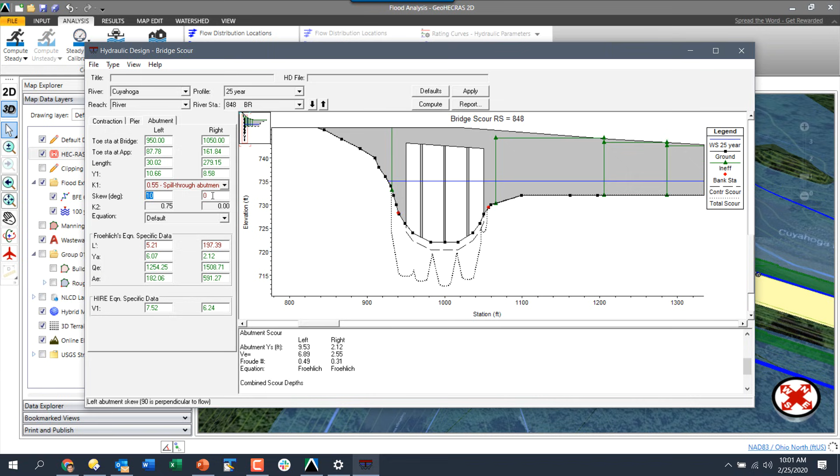But again, I've had some issues with this skew angle, so I don't know if they've got it hooked in there backwards or not. I think you can put in a negative angle too. Let's see if we put in a negative angle. If I say -10, no. So of course it crashes right out if you put a minus sign. It dies out of there.

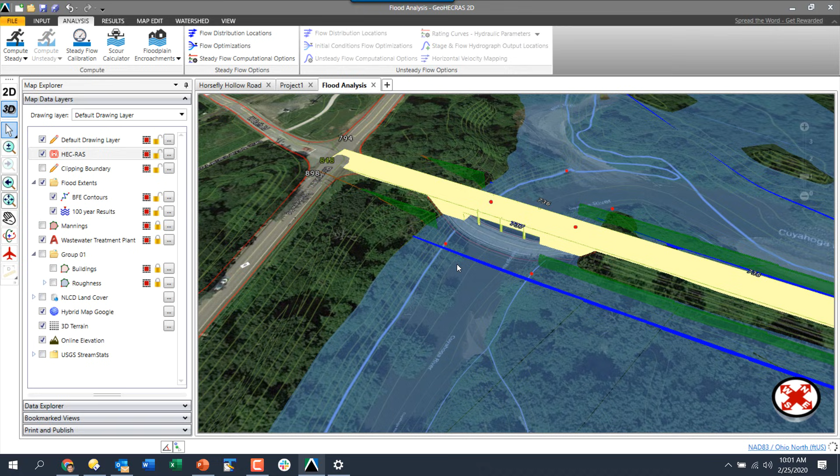Okay. But anyways, let's go ahead and try that real quickly. It should only take maybe 10-15 minutes maximum. If you guys can work on that example that we had yesterday. And if you don't have a bridge pier in there, I'll show you how to put a pier in there real quickly. We'll just double click on it, brings up our structure. Now in my case I don't have a bridge pier, right? But let's put a bridge pier in.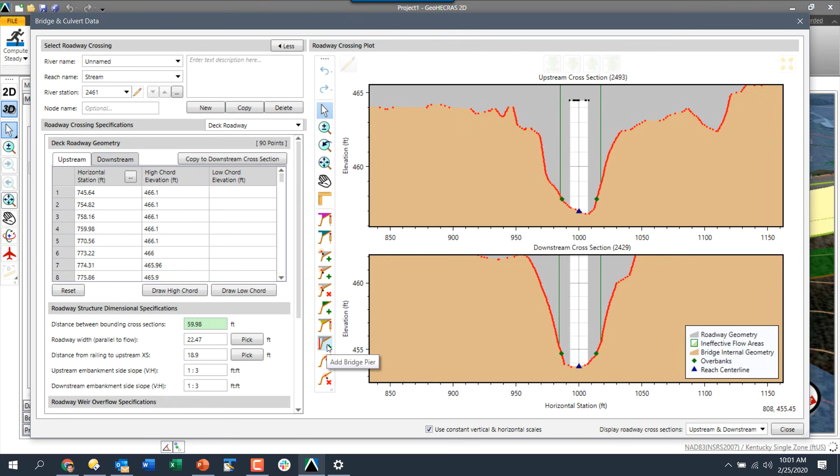So you can use the little draw bridge pier, say add bridge pier, come in here and just click, right? It'll stick a bridge pier right there. Come down here, click it, adds a bridge pier, and then I can change these stations. I can change that to 1,000, so it's centered. So that's a fast way if you want to put some bridge piers into your structure. Again, remember, do that velocity distribution, and then compute your scour. Okay? And I'll walk around the room to help you guys.